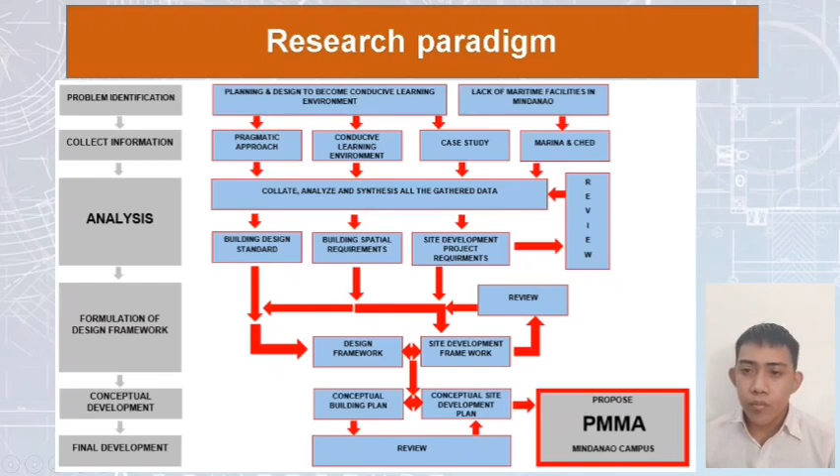And for my research framework, it consists of different stages, from problem identification, collection of information, analysis, formulation of design framework, conceptual development, and lastly the final development.

For the scope of my proposal, for my spatial requirements, my proposal consists of different types of buildings like recreational facilities, academic buildings, and other buildings that support my proposal.

And for my research topic, achieving a conducive learning environment through a pragmatic approach in learning facilities. When we say pragmatic approach, it is a philosophy developed in the 1900s by Charles Sanders Peirce. It is a philosophy that helps us understand and give a clear and distinct idea through the help of 3 levels of clarity.

The first level was based on everyday experience. The second level was the ability to give a definition based on that experience that the general public would understand. And for the third, he explains that we need to analyze and consider the effect that might conceivably have practical bearings, since it was already experienced by others, so it will give us a probable insight into the result.

And when we say conducive learning environment, it is a concept that satisfies the needs of its users and removes the feeling of not being part. It also helps to increase participation and cooperation, which develop through the proper layout, proper location, environment, and adjacent facilities.

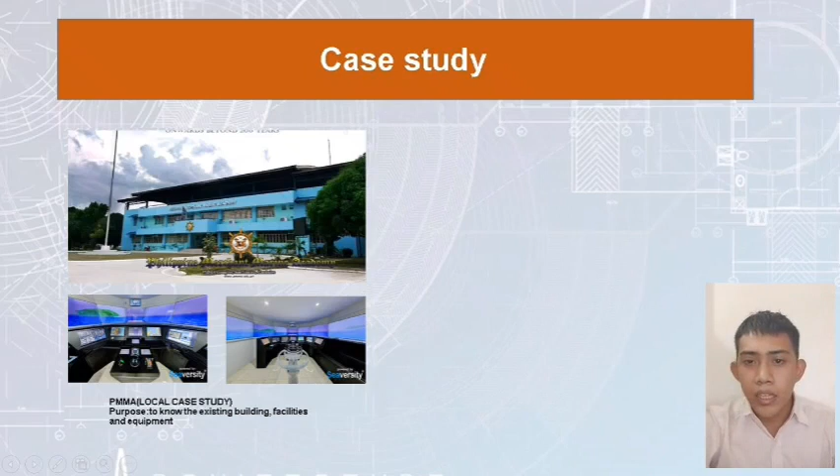For my case study number 1, local, PMMA, it helped me know the existing condition and their facilities. For my case study number 2, TMA, it helped me know the basic spaces of a maritime school. For my case study number 3, local, MMMA, it helped me know the considerations, or the equipment and machineries that need to be considered in designing.

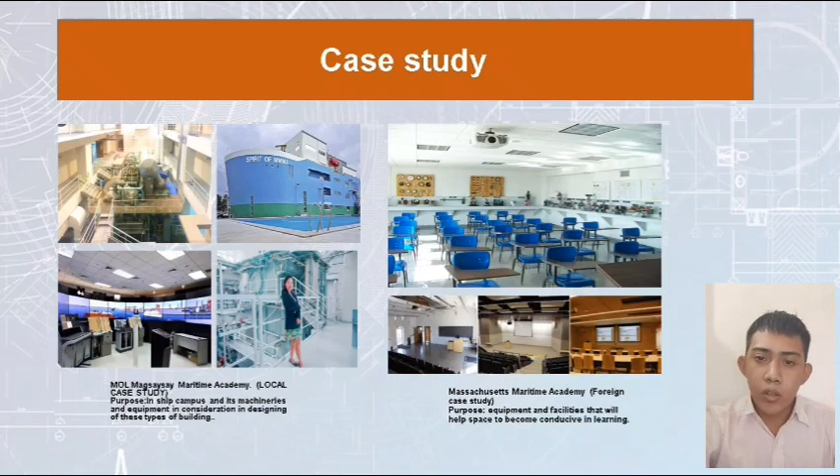For this case study, MMA, I aim to know the latest facilities, equipment, and technologies that eventually help schools become conducive to learning.

For site criteria, it consists of 2 categories, major and minor. For major, 60%, it consists of 2: lot size, 30%, which is very important because unlimited space for the academy is needed for training, exercises, and other activities; and accessibility to facilities and utilities, 30%, since facilities that can support the development is very important.

For my minor criteria, location and road networks is 25%. Location is very important since my proposal is PMMA, so I need a location with transport facilities that can support the project. Topography is 15%, important since I have a lot of outdoor facilities like parade ground, obstacle course, and formation ground that need flat area, since slope area is expensive to develop.

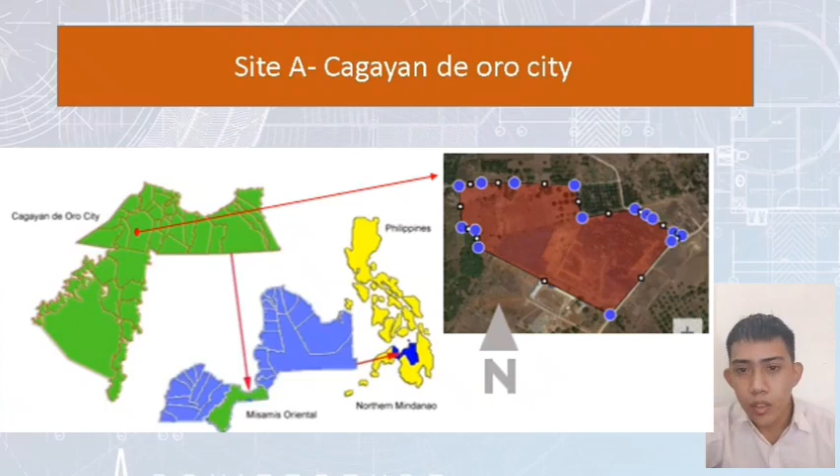For my site options: site A, Cagayan de Oro City; site B, Cotabato City; site C, Davao City. Based on my Likert scale, the chosen site was site A, Cagayan de Oro City, because it met all the criteria. In terms of location, Cagayan de Oro is halfway to Visayas and Mindanao. It also has a good transportation system from land, air, and sea.

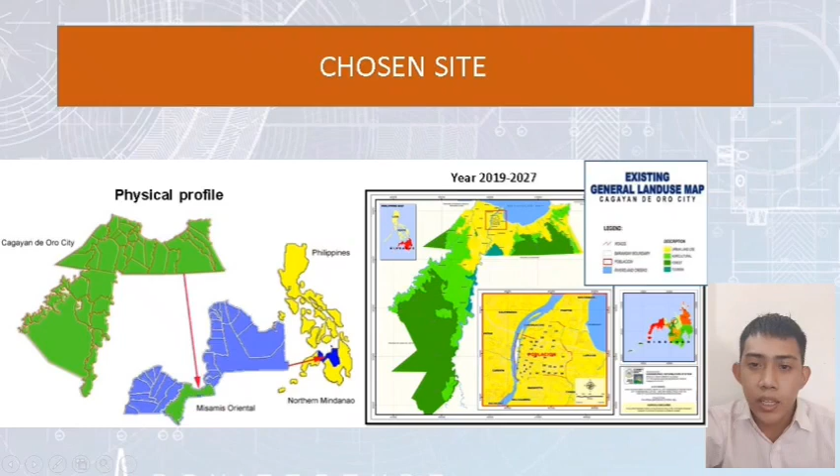From sea, they have the largest passenger terminal, and for air, they have an international airport and Lumbia Airfield. For land, they have highways connected to different cities in Mindanao and its provinces.

For my 3-kilometer radius catchment area, as you can see, most of the facilities located within the vicinity are residential areas, open spaces, and agricultural land fields.

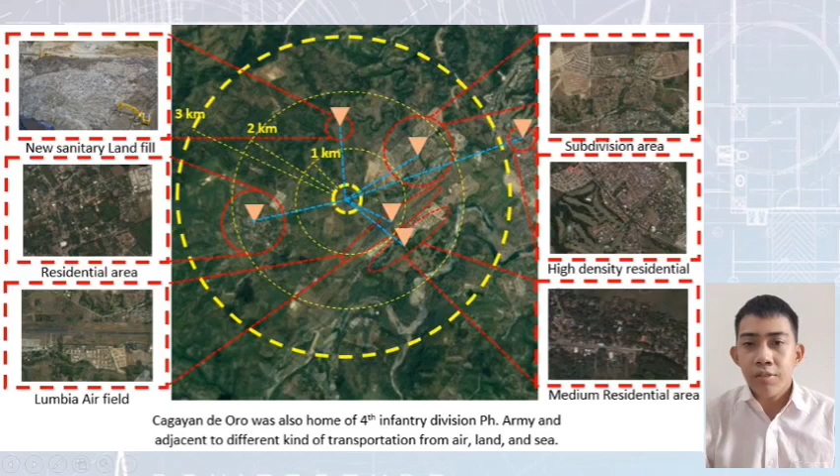For my SWOT analysis, for strength, the site is located in a peaceful and underdeveloped area, and it is also surrounded by nature and good vegetation. For weakness, the soil of the site, which is clay, has inconsistent volume between wet and dry, and the roads are also narrow and underdeveloped.

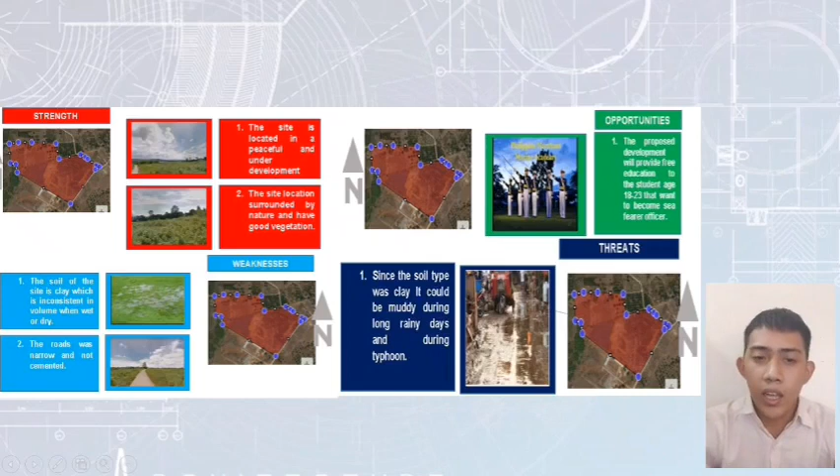For opportunities, my proposed development will provide free education to students age 18 to 23 who want to become a seafarer officer someday. For threats, since the soil type is clay, it could become muddy during long rainy days and during typhoons.

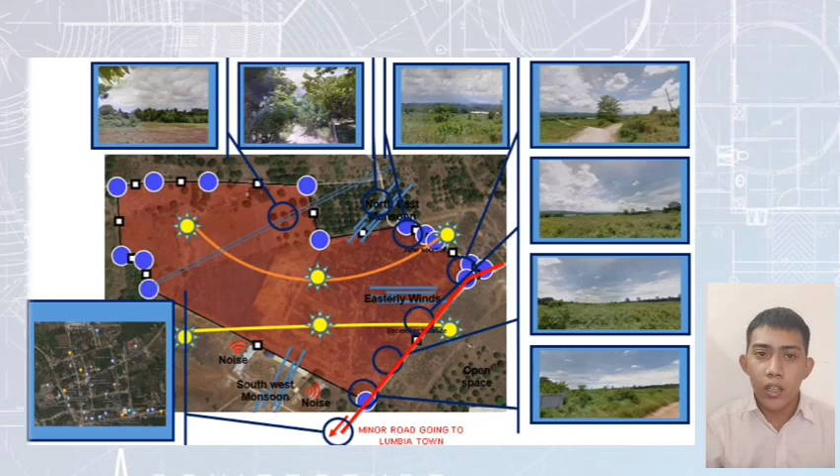Of the site, as you can see, most of the surrounding area is composed of bushes and grass. Some parts are surrounded by trees and open spaces.

For my design framework, for the design philosophy, I see my building as a piece of a city, and in my designs I try to make them into responsible and contributing citizens, based on the dictum of Cesar Pelli. I see the idea of a campus as like a small city comprised of different types of buildings, and as a designer we are responsible to provide facilities that can satisfy and improve the life of the users that will eventually contribute as citizens.

For the concept of the proposal, incorporating the concept of a conducive learning environment through a pragmatic approach to my proposed PMMA Mindanao campus, which aims to provide a facility that satisfies the needs of its users and increases their participation and cooperation.

For the architectural style, international style will be used. It is known for the use of steel, glass, and concrete. The architectural details that would be adapted include the use of concrete as a finish for low maintenance, rectilinear form, use of steel, and use of glass for natural lighting.